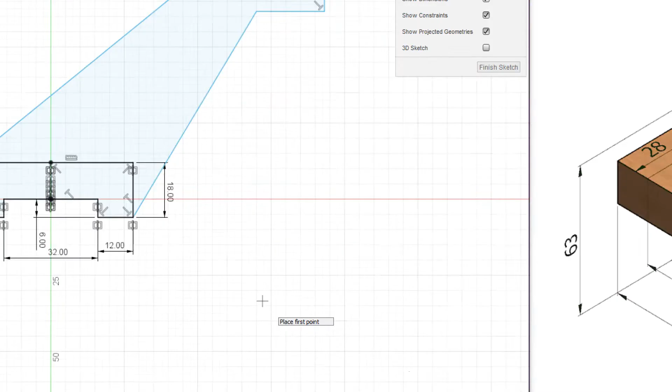So notice here how it starts. It starts at the top of the piece, goes this way, but then it ends not at the top again. It actually ends touching the bottom there. That's important. So what dimensions can we get out of this? Well, we're going to say that this line is the center of the circle, and then we could go ahead and put the circle in later.

So if that's the center of the circle, well, the center of the circle to where this arm bends over here, this is saying that that's 36. And it is 100 from here all the way to where the piece starts there on the left. That's 100. All right, this messed up some of my geometry, so I'm going to move this over. There we go.

We can tell that it's 25 for the total height of this piece here. So I'll go over there. That's 25. All right, what else are we missing? It is 22 for the entire... Oh, well, here, let's do the height here and see if we might not have to worry

about that 22. So it's 63 from the top of this line all the way to the very bottom of the piece. So that's like that. That's 63. All right. And now there is this here. And with this, it is going to be the entire diameter here of this circle, which is 36, but

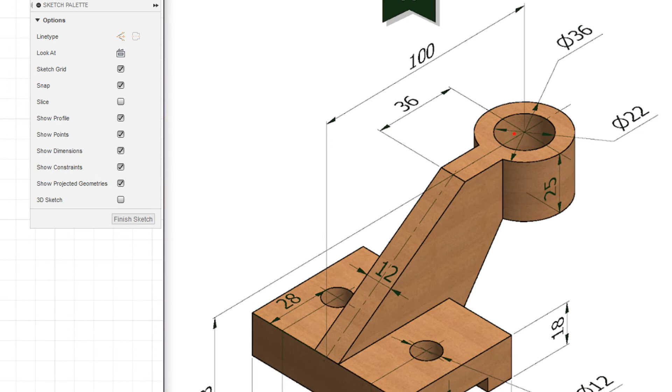then I believe it's going to be half of that. So let's double check that, but I believe that's right. So let's do this. 36 divided by 2, 18. And yeah, that's accurate. So basically the reason why we did that was this line, if you imagine that it's going through the piece there like that, well, it's going to touch this.

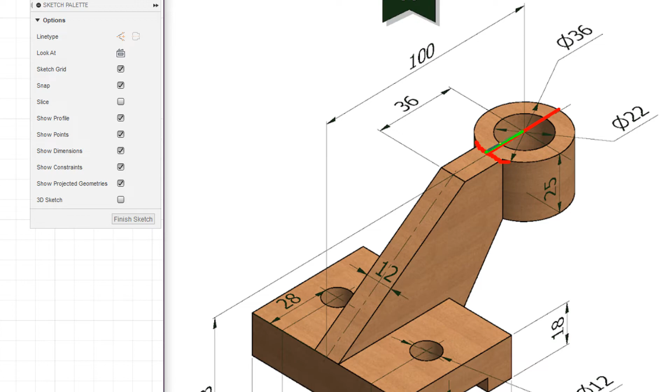Notice how this circle, if it were to continue without that arm there, right? The edge of that would be the entire diameter from here to here. And from here to where it touches, the green line would be the radius. And we know that the radius is half of the diameter. So if that's 36, that's going to be half of that, which gives us 18.

All right, so we can go ahead and finish that sketch and click home on the view cube. Now you'll notice that this is going to be pointing in a different direction because they must have used the right side instead of the front. But you know, we always want to stick with our engineering convention, so we're going to make that the front.

Okay, now we are going to go ahead and extrude the bottom part first. So that is going to be 75 in both directions. So we'll do direction symmetric, turn on whole length, 75, and click OK.

Show sketch one again. And now we'll do the top, and we will extrude that symmetric, whole length, and this time 12 for the distance. Click OK. Hide sketch one. That's looking pretty good.

Now, if you want to view it from the same view as this one, instead of clicking the home button, which is really just that corner, the corner between front and right, click on the corner between front and left, and you'll get the same view. And you'll see that we're looking pretty good here. Let's go ahead and do that circle now.

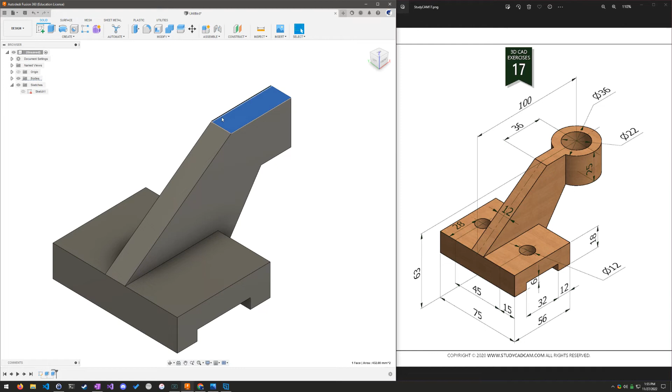So we're going to click on this portion of the arm and create a sketch right there. And now it's just a matter of creating two circles, two concentric circles. So my first circle doesn't really matter where it goes, but the second circle, click on the center point of the first circle. We'll dimension both of those. The bigger one is 36 and the smaller one is 22.

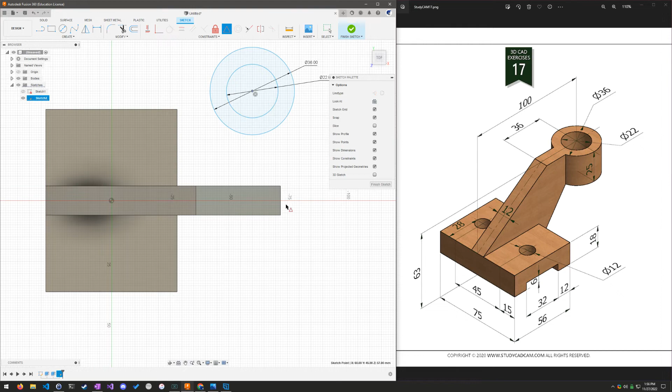And we'll make the center point touch the midpoint of the end of the arm, because we said that that was going to be half of where that circle was, right? That line was going to go on that center point. So that's exactly where we want that to go. And we'll click finish sketch.

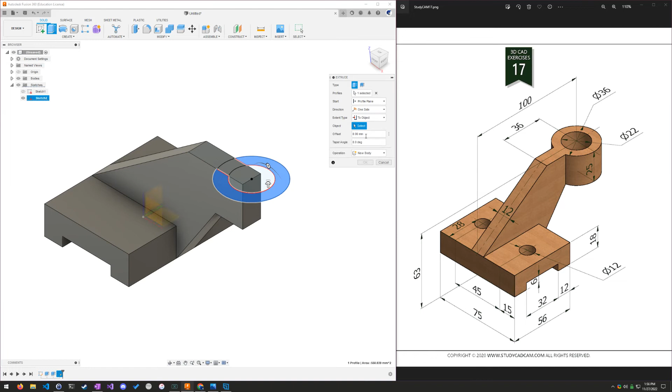Now we'll go ahead and extrude the outer part down. So we'll extrude that. And this time we're going to go to object, because we just want to extrude it to the bottom of this, so that it touches the bottom of that arm. Because remember, we made that arm 25 in length there. You see? Now it's going to leave this little tab here in the middle. That's okay. We can delete that later, because we're just going to go ahead and do another extrude,

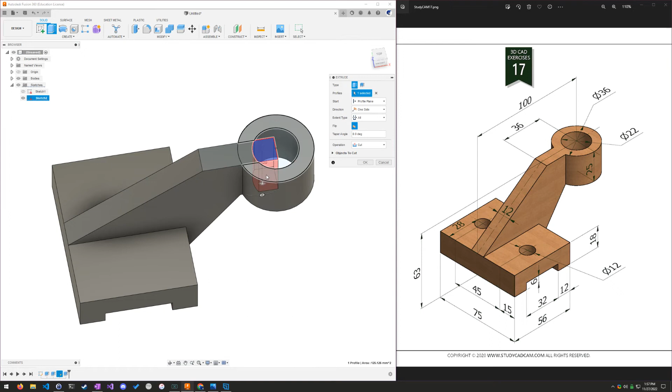turning on sketch 2 again, so we could select that little piece. And this time all, because we want to cut all the way through. Click flip so the arrow points down, and click OK. And there we go. So if we click on that corner between front and left, we'll notice that looks pretty darn good. We are just missing the two holes on the left and the right. So we're going to go ahead and do that now.

So from the top view, I can create a sketch on, not a sketch, I'm sorry. I can create a hole on the right side. Let's do that now. Let's go to modify. No, I'm sorry, not modify. In create, hole is right there, staring right in front of me. It is 15 millimeters. See that? This line here. If you could see that, this line is saying the center of that circle, 15 from the edge. And it's also 28 from that edge.

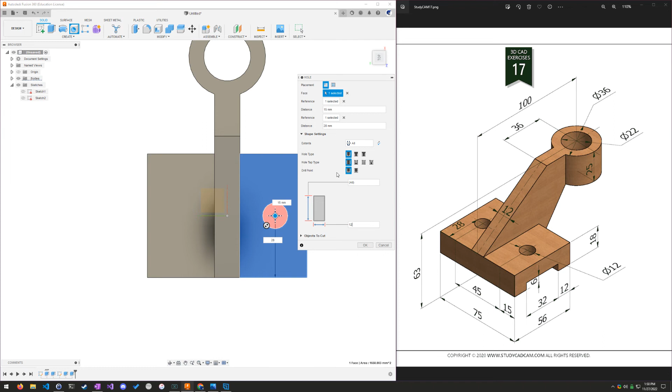So reference from the right side is going to be 15. Second reference from the bottom is going to be 28. The diameter of that hole is going to be 12. Let's change the drill point to flat here. And the distance is just going to go all the way through. So the only thing we have to worry about is the diameter, and that's going to be 12, slightly smaller hole. And that's it. Click OK. Does a little math to figure out where that hole needs to go.

Now we can go ahead and mirror that, because we drew this piece. If I show the origin, see this little eyeball next to the origin folder. Since we drew this right along the X line here, this XZ plane, I can go ahead and use the mirror tool now, which is going to be inside of create all the way at the bottom or near the bottom.

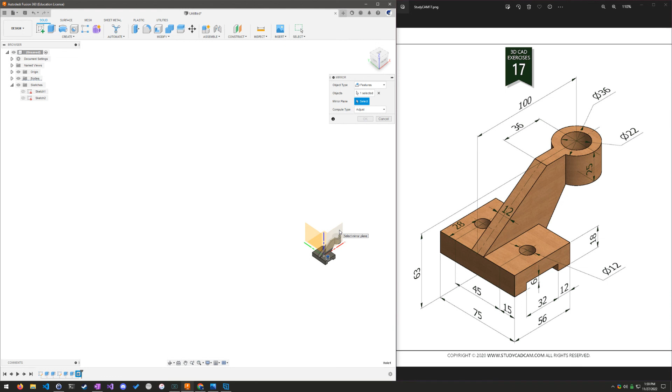Click mirror. What we want to mirror, we don't want to mirror a body. We want to mirror a feature, because these things all the way at the bottom here, these are all features. The extrudes are, and the hole as well. So we're going to select the hole as the feature that we want to mirror, and the mirror plane is going to be the XZ plane right there. And you'll notice that the preview that we get is accurate.

We want it right on the other side of that. And the compute mode, we can just go ahead and leave that on adjust and click OK. And it'll put another hole on the other side. Before we take our screenshot, let's turn the origin off so it looks nice and pretty. And here you can either do a picture with the home button clicked here, or if you want to make it look like the picture there, you can also click on the corner between front and left.

Either one is fine. I imagine they did it like this so that they could show that it's got the two holes there, which is fine. With this though, we would just assume that this is our front view, right? That would be the right side view, and that would be the top. Decisions that we make as engineers. Whoops, that's not good. There we go. All right, so you can go ahead and take your screenshot, submit that, and as usual, hope this video helped.